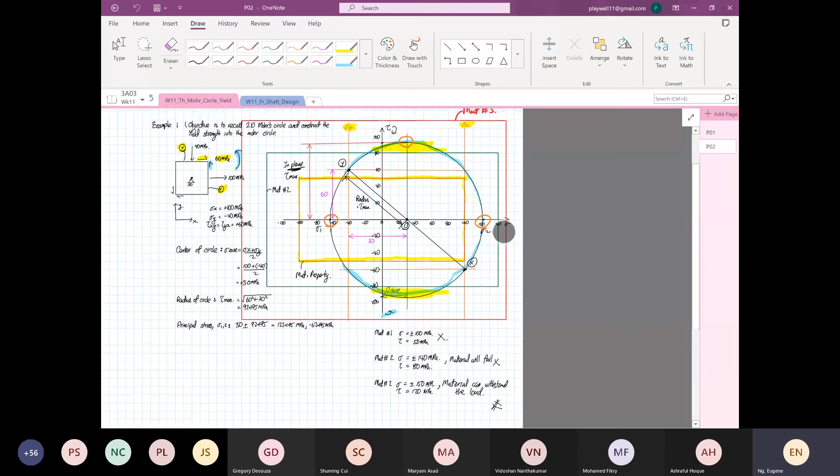So some of you might say, Eugene, I'm not so sure about 2D Mohr circle. If you're not so sure, go to week 11 Thursday lecture. I did talk about 2D Mohr circle before, so you guys will have done it. Even if some of you can't remember, just go back to that week 11 Thursday lecture recording, and you can recall how to do 2D Mohr circle.

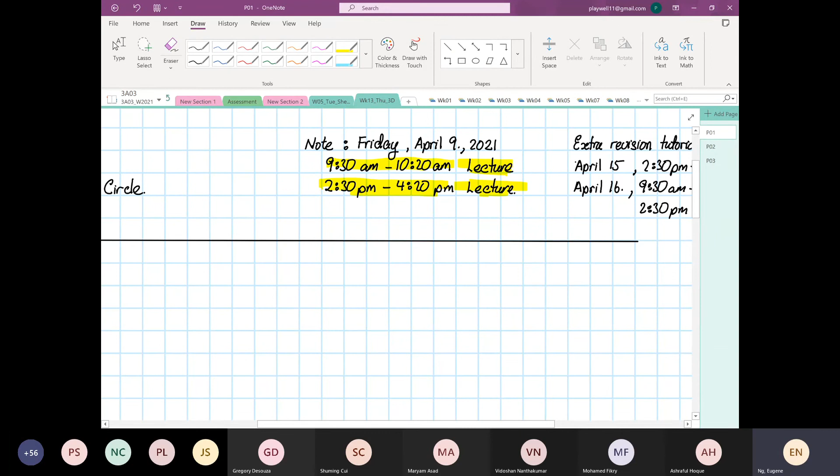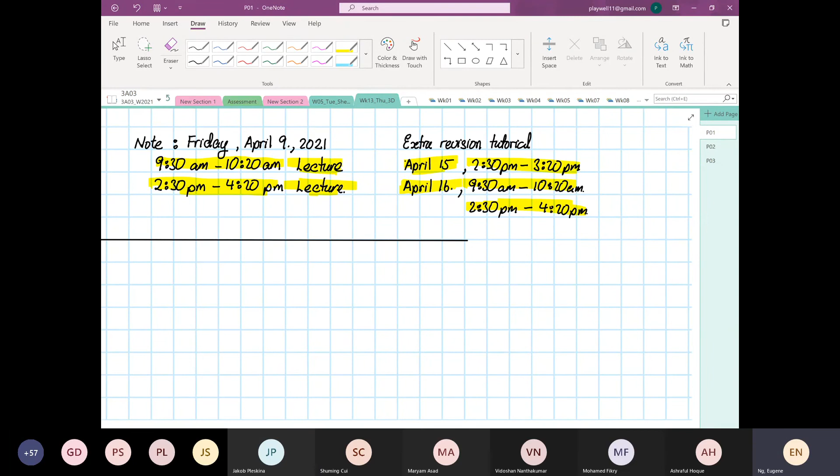Can anyone tell me, is this time good or no good for you all? Do you all have a test or an exam? Anyone? Or you all don't know yet? I think the math exam is that morning, the Friday. Oh, Friday morning, okay, don't worry, I will record, I'm not mistaken. Jakob, don't worry, I will record it. If you have a question and can't make it for 9:30, 10:20, give the question to your friends to ask, and I'll answer. Is it everyone having the math exam, Jakob? I'm pretty sure, unless you already took math. But I'm pretty sure the exam's that Friday. Anyway, I'll still run it at 9:30, 10:20, I'll still record it. So after your math, have a good drink or get something to get high, but still come for my revision. Right, any questions so far? No, okay, here we go.

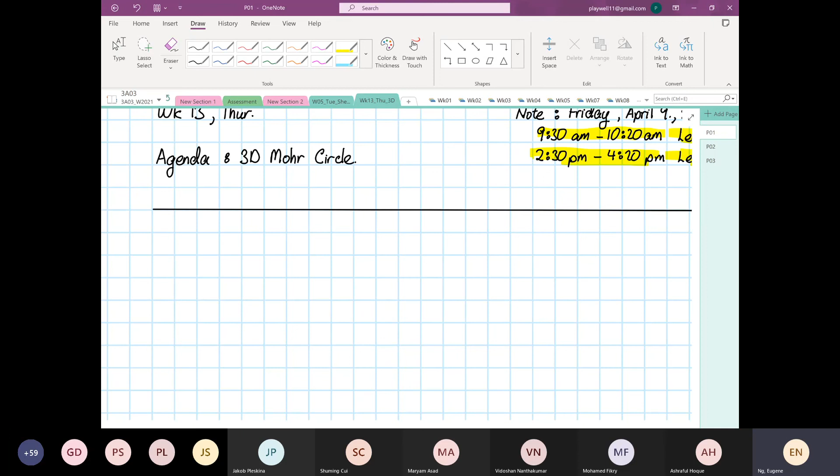So we are going to do 3D Mohr circle now. 3D Mohr circle is just 3 circles. It is not a sphere - don't tell me, Eugene, where are we going to draw a sphere? The answer is no.

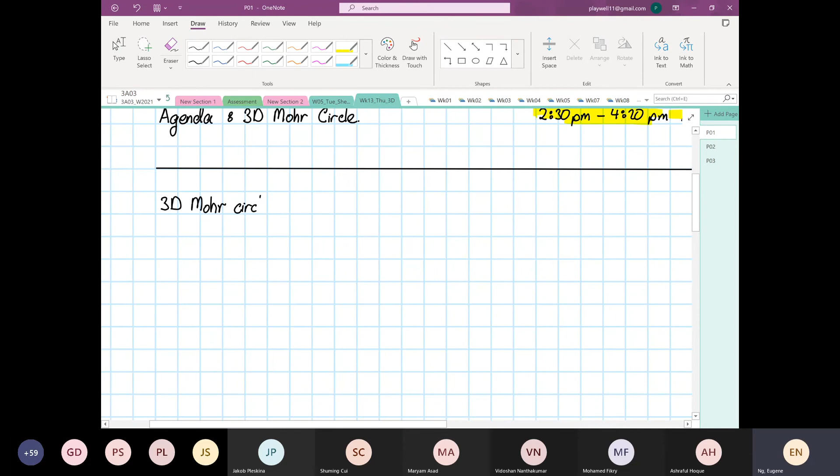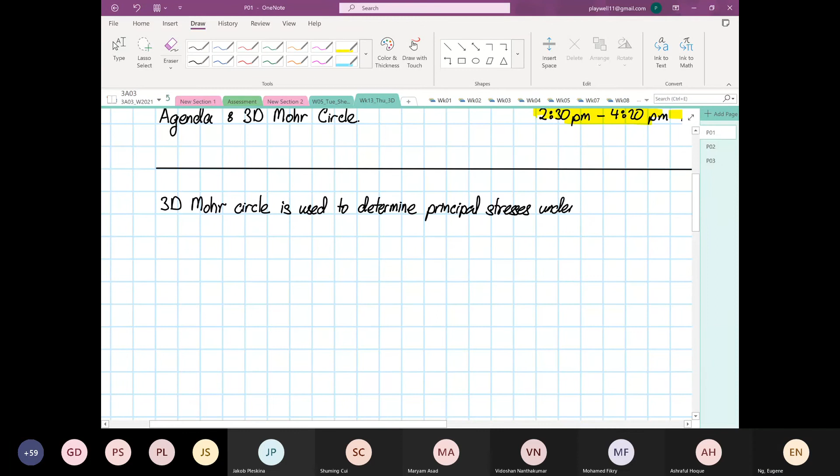3D Mohr circle is used to determine principal stresses in compound loading, or under compound loading.

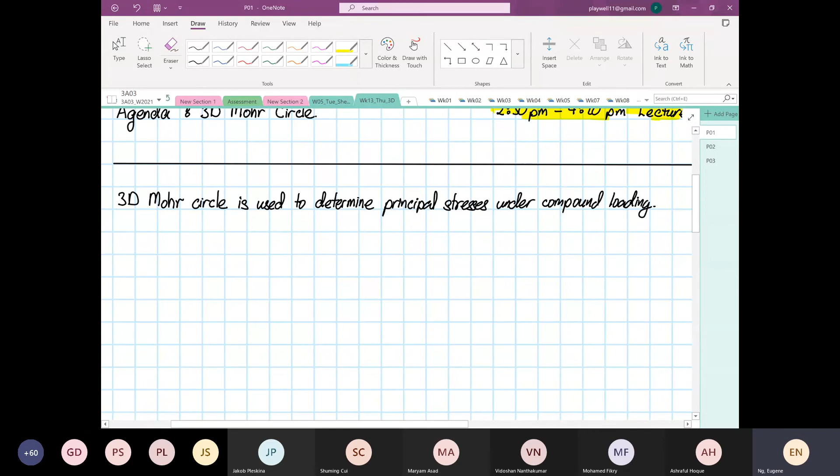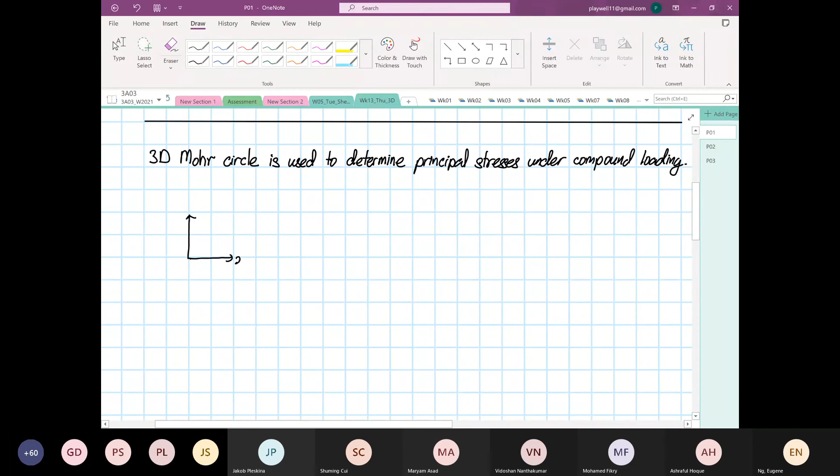So in 3D, we are no longer dealing with a square. We are looking at a 3D space now, with X, Y, and now another axis Z. I'm going to show you later - sometimes it's okay to do 2D analysis, but most of the time it's preferred to do 3D.

When I was an expert witness, a chief engineer just used 2D analysis and underestimated the stresses - by right he should have used 3D. So I'm going to show you all what I've done to prove the hypothesis of why 3D is important. 2D fundamentally is also critical, so as I said, you need to know when to use what, which I want you to learn.

So now in terms of 3D, as I said, we are now handling a cube - no, I mean it's not a cube that is square on all sides, or equivalent on all sides. So when that's the case, how many force components do we have now?

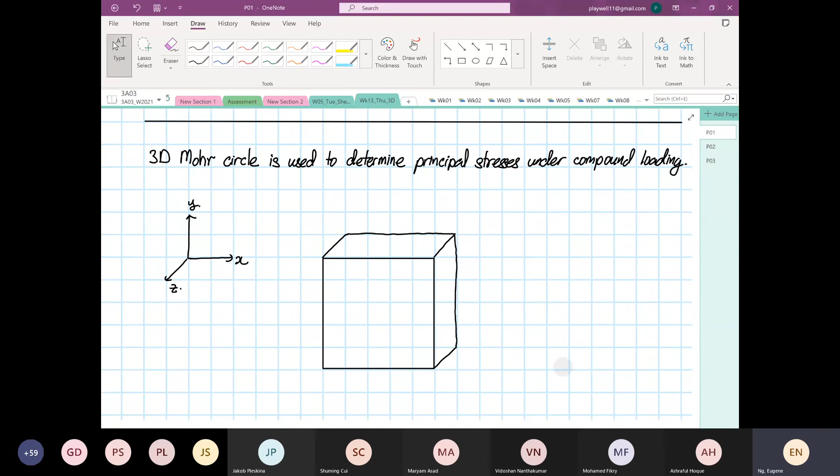So I'm going to draw our force components now. You have our stress in X. A bit of good news: when it's 3D Mohr circle, it is not 3 times more difficult than 2D Mohr circle. It's not, okay? It's just a bit more. So you have your normal stresses over here, then you're going to have your shearing stress, your shear stress, which will correspond to one shear stress here.

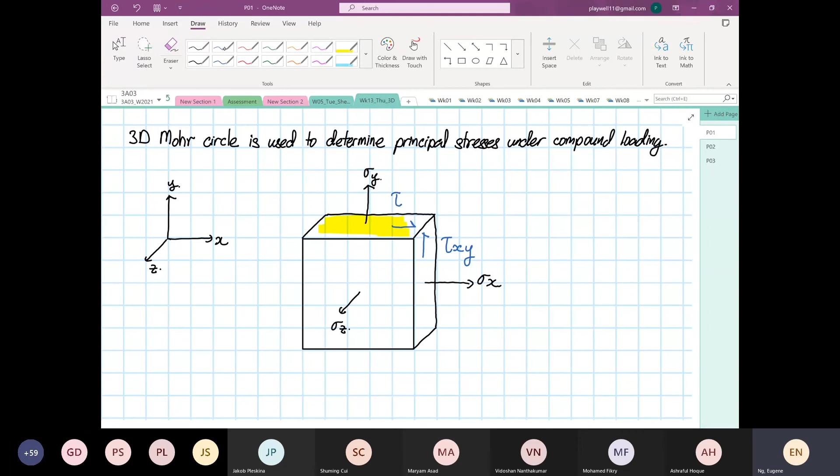So this is shear stress. The intersecting plane is intersecting the x-axis, and the shear stress is in the y-axis. So over here, the plane - what do I mean by the plane? This is the plane intersecting the axis. So the plane intersecting the axis over here, it intersects the y-axis, and the force direction, or the shear stress direction, is in the x direction. So that's how it's labeled. I've done that before, just a quick refresher for you.

Then over here, you have a different plane now, so you have some more shear stress over here. The shear stress I've drawn there - this intersecting plane again is in the x, but the shear force direction is in the z. Likewise, for the other side, the intersecting plane in the axis is the z, and the shear stress is in the x. Then the final one that I'm going to draw is this one over here.

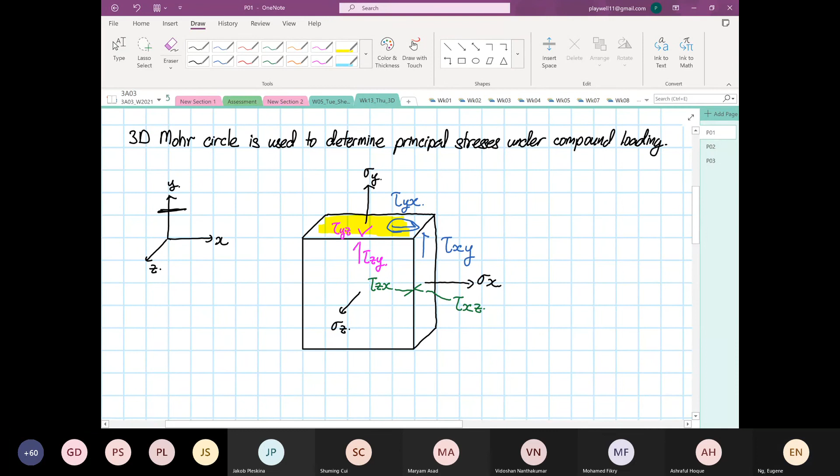Okay, so again, the intersecting plane is in the z, and the shear stress is in the y. Okay, likewise. So maybe I'll do a quick recap for you guys, that shear xy, or I'll call it the state of equilibrium.

Shear xy is equal to shear yx. Shear xz is equal to shear zx, and shear yz is equal to shear zy. Okay, that's what we call the state of equilibrium. It means the deformation or the loading of the structure has been stabilized.

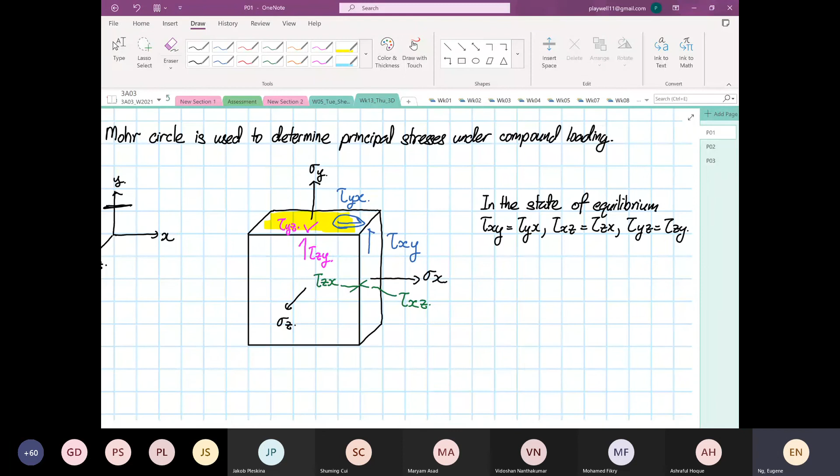Okay, right. So then I'd like to talk to you guys about a term that you all will see. Some of you might be taking a finite element course, which I really find very, very useful. So there's a term known as plane stress analysis. So when you come across the term plane stress analysis, what does it mean?

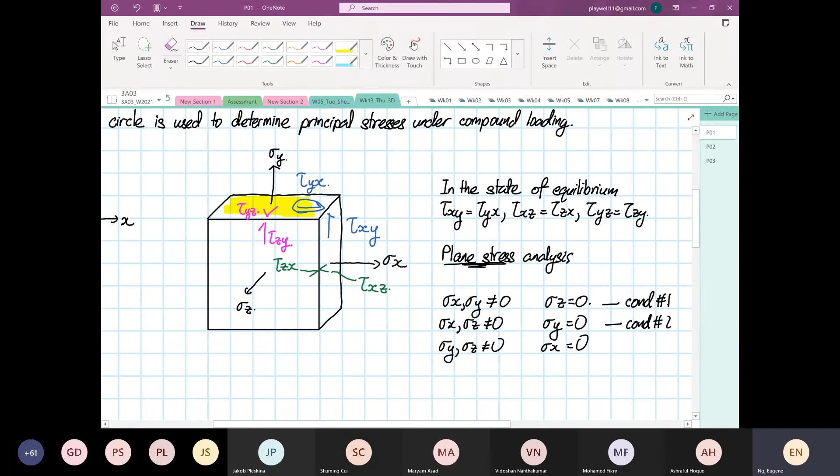It means that stress X and stress Y are not equal to 0, while stress in the Z direction is equal to 0. It's also possible where stress X and stress Z are not equal to 0, while stress Y is equal to 0. So these are condition number 1, condition number 2, and finally where stress Y and stress Z are not equal to 0, you have stress X equal to 0, condition number 3.

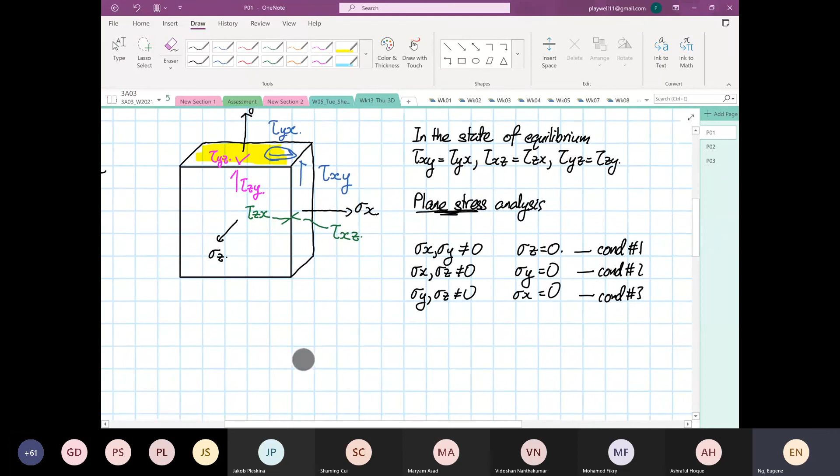You have not seen this before, but once you go to 3E05 or finite element, you are asked to analyze the structure under plane stress condition. So this is what we call plane stress analysis. Then there's another possibility, which I don't think you touch as an undergrad, but if you go to graduate school, there's another condition we can analyze, plane strain analysis. Just quickly, this is just for knowledge.

Okay, so plane, as the name comes, as you can see over there, looks like something went wrong. Hello, can you all see me? Did I black out a bit? No, sir, I can see. Okay, because my computer says the presentation is on hold.

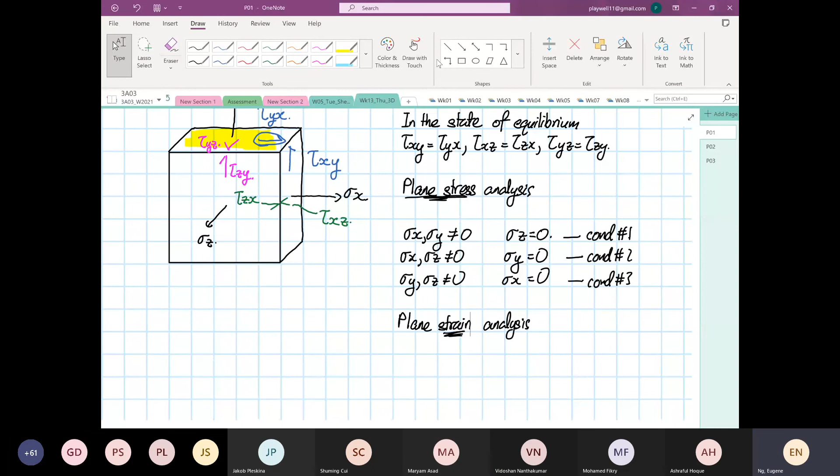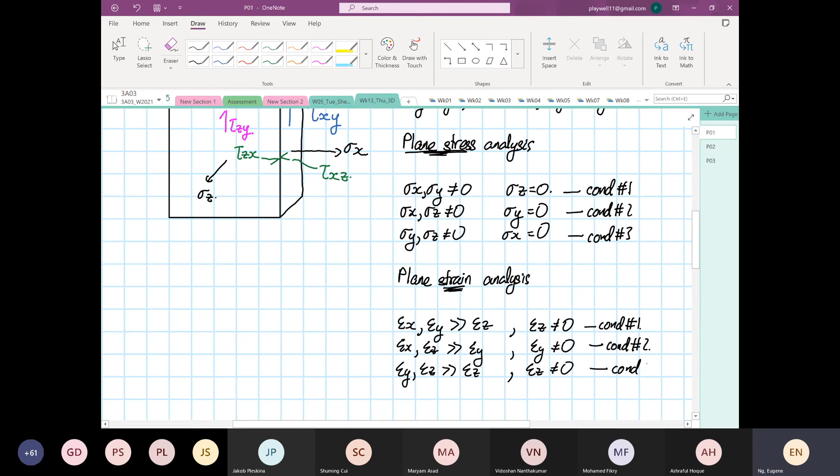Okay. So under plane strain, strain in X and strain in Y is very much greater than strain in Z, and strain in Z is not equal to 0. That is condition number 1. As I said, you don't see this as an undergrad student. If you go to graduate school, probably you'll see. So likewise, I'll write this quickly, I don't waste too much time. Condition number 2. Condition number 3. But for this course, we are going to focus on plane stress analysis.

Okay, so some questions say plane stress. You need to know if it's declared to be plane stress, you still need to do 3D analysis, but you will know one of the stress states is equal to 0. Some of you might ask, how do you know? The question will tell you there are 2 directions with stresses, and you have to analyze one more that is not. For example, if I say stress X and Y have stresses and do plane stress analysis, you have to say that stress Z is equal to 0.

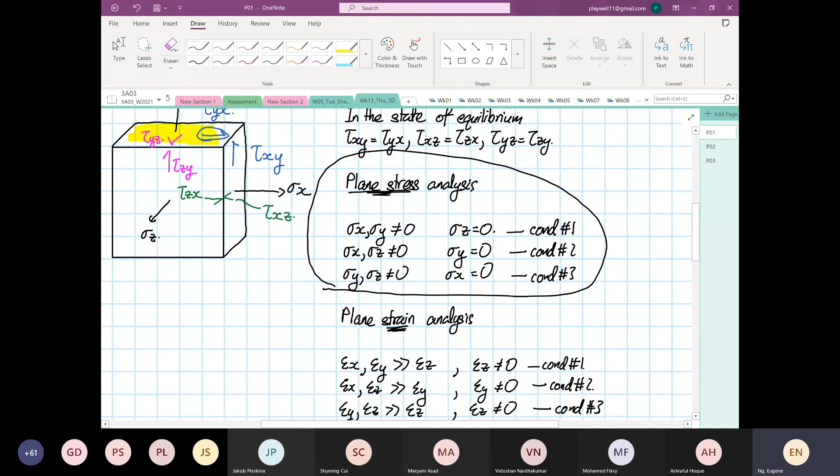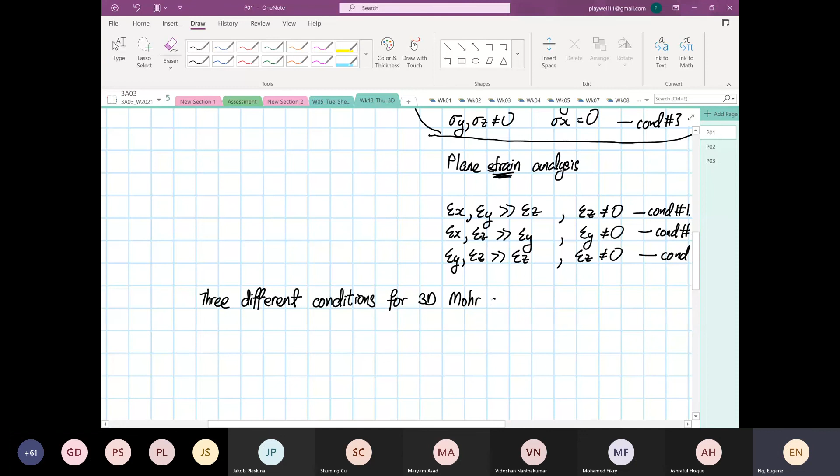Okay. Now, from here on, I'm going to have 3 different conditions. We are going to look at 3 different conditions for the 3D Mohr circle, and the element is oriented in the principal plane direction. Okay, so what do I mean by that?

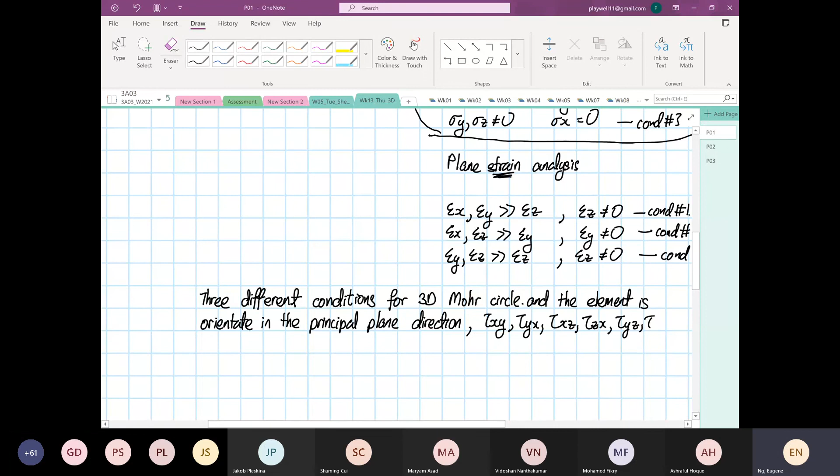When I say the element is oriented in the principal plane direction, shear stress xy, shear stress yx, shear stress xz, shear stress zx, shear stress yz and shear stress zy are all equal to 0. So here you only see normal stresses. I'm going to state 3 conditions, which are a foundation, so you will know when you absolutely have to do 3D stress analysis, and in what condition you can just rely on 2D.

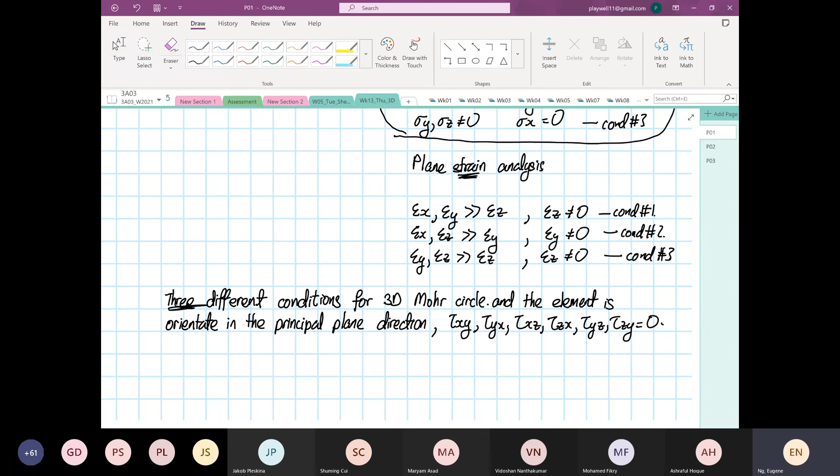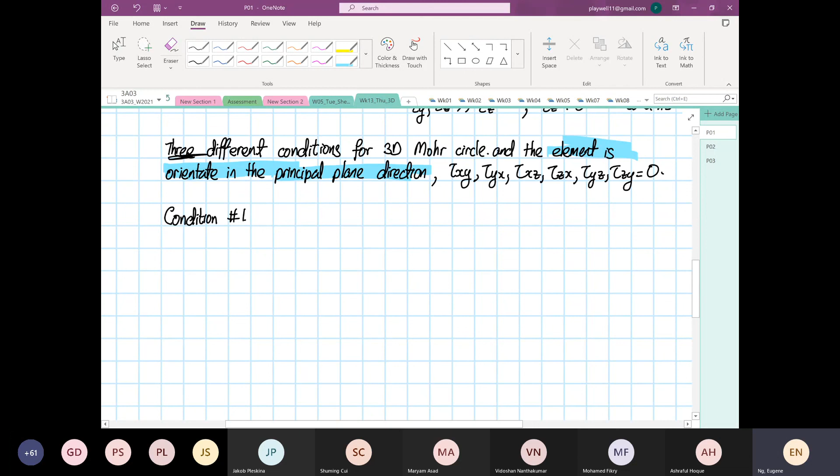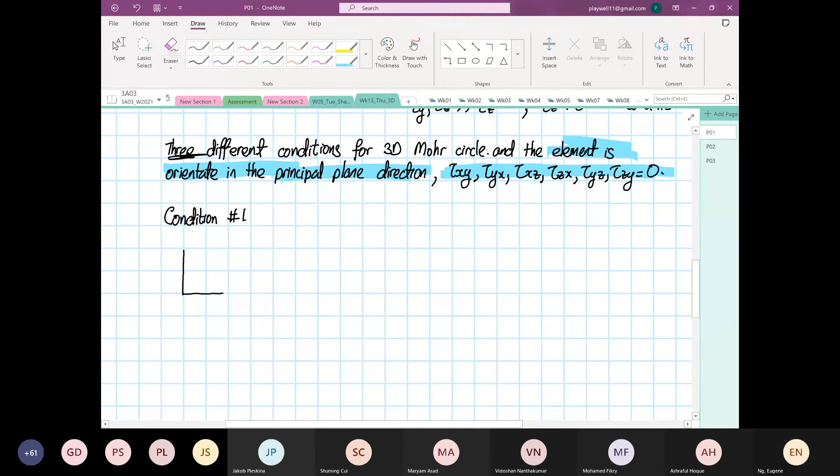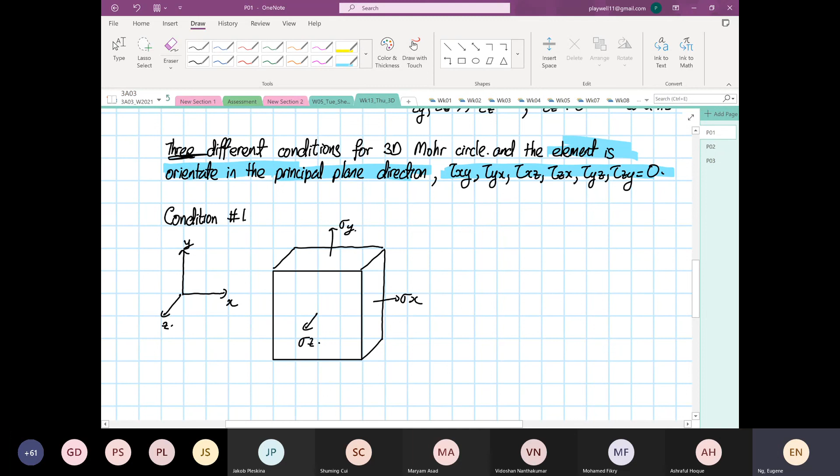Okay, right. So we are going to look at condition number 1. All the conditions I'm going to draw are where the element is oriented in the principal plane direction, where any shear we have is absolutely equal to 0. So let's draw the first transformation. Then the element, again you have stress X, stress Y, stress Z. Okay, so condition number 1. I should have moved this slightly lower, my apologies.

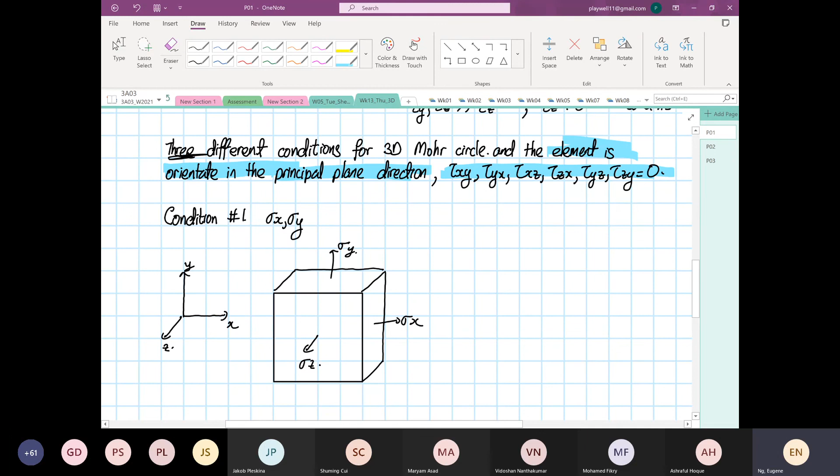Okay, condition number 1 is where stress X and stress Y are both positive, and